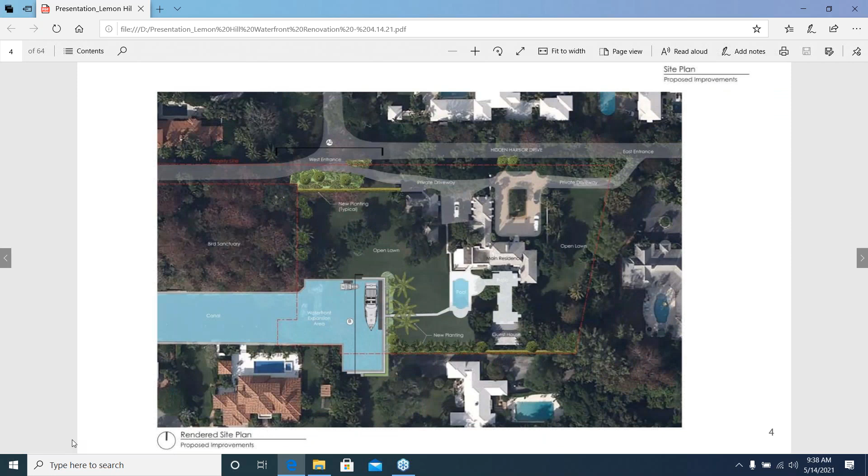Let me give you a quick overview of the project. This is the present condition—the canal comes up to our property, and on top is Lemon Hill, as you can see on a number of acres. We're expanding the waterfront, adding a few docks on our property as well as on the Smith's property, and enhancing the seawalls on Mr. Barton's property, our property, and their property.

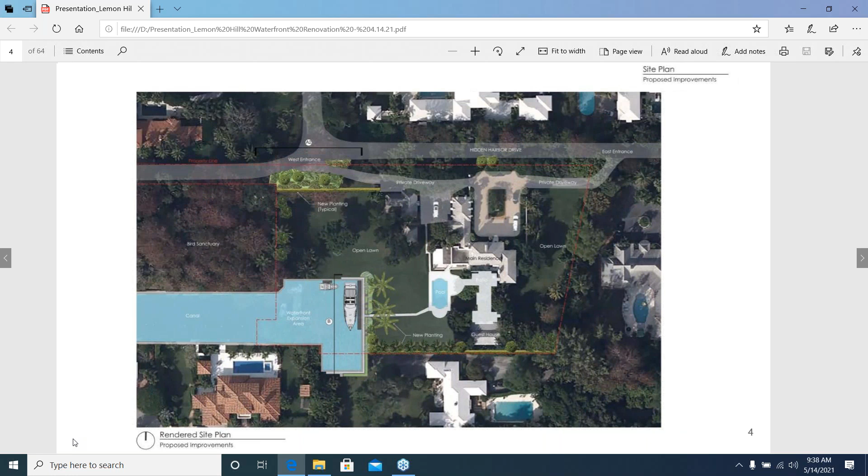This is an enlargement of the waterfront expansion area. We're also going to enhance the west entrance to our site around the service area. At the end of the day, there'll be expansive landscaping so nobody can look into our site, as requested by our neighbors, and we're happy to do that.

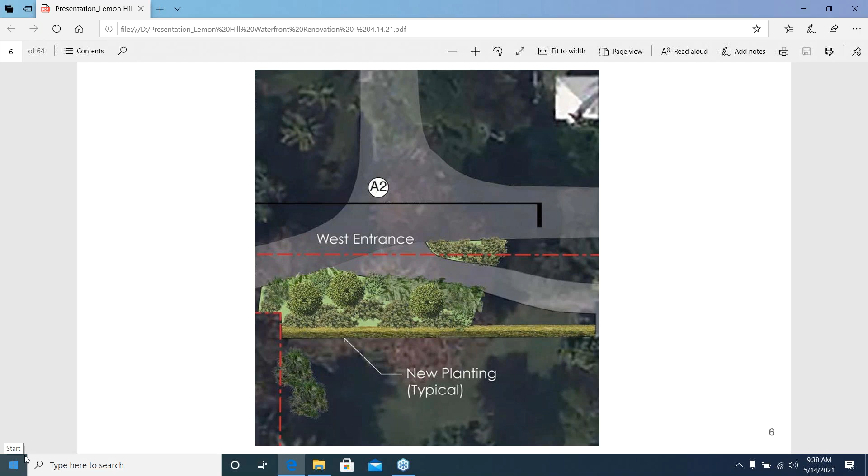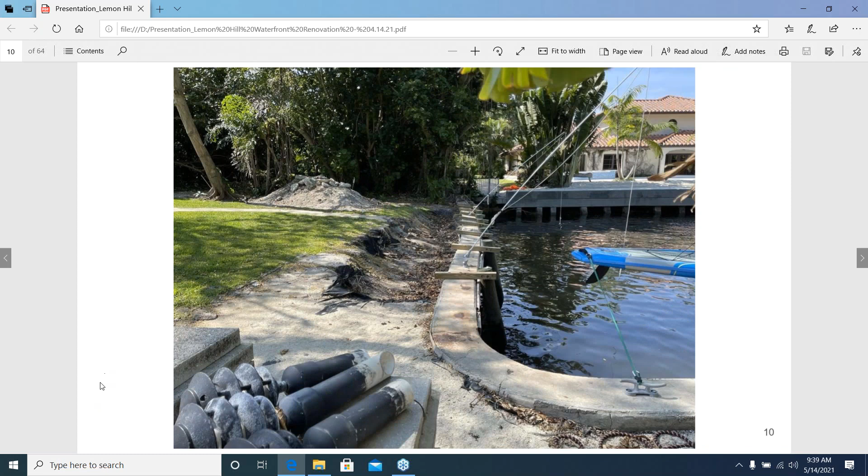So that's an overview—let's talk about existing conditions. When we purchased the property, we knew there were problems with the seawall. They only got worse. We've reinforced them to keep them in place so there'll be no injury to the water or to adjoining property owners. As part of this process, we looked into it and realized we could enhance our seawall system.

We looked into the TRULINE hybrid system, which will be explained later if you have questions about it. Essentially it's an aluminum prefab system that's put into the ground, and then rebar and concrete are poured in. There are substantial engineering drawings with the details, but we don't need to go through that right now.

Let's talk about the existing conditions of the site. As you can see, there's an expansive yard down to the water—you walk down to the water to the seawall.

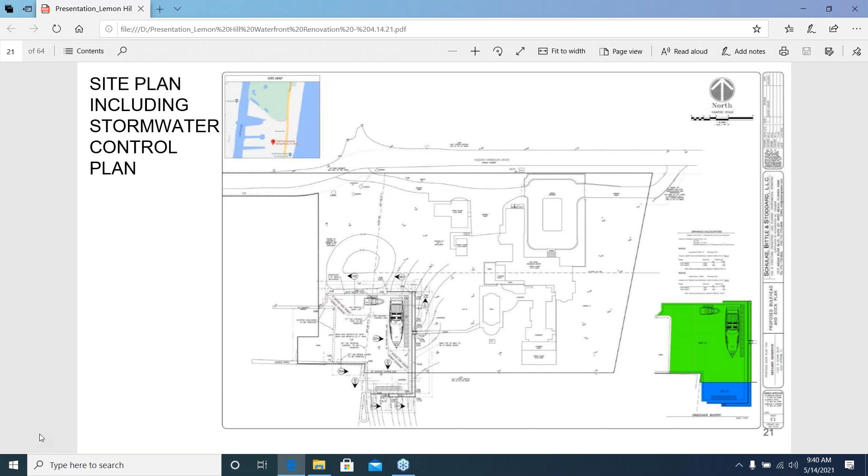That is the area in which the site plan will be implemented. When we remove the land, that would be an area that would absorb water. We are going to keep all water runoff on the site, even though that's not required—stormwater control isn't required for residential properties. We felt the best practice would be to keep the water on the site by appropriately contouring the land.

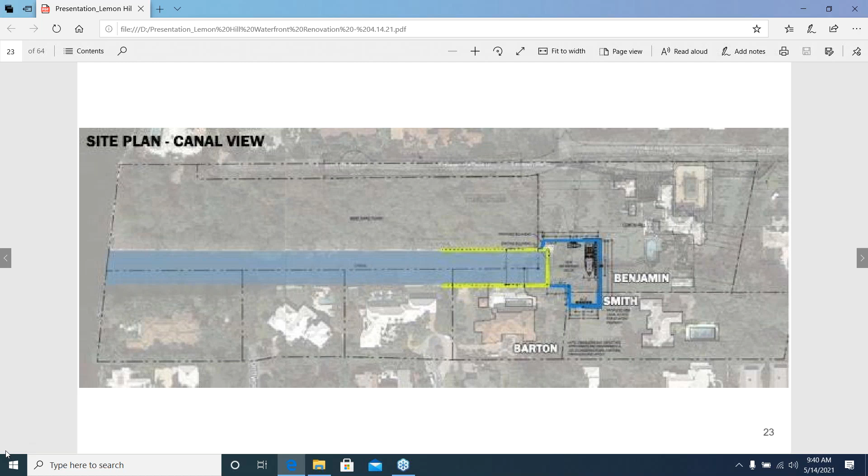This is a more architectural presentation of the waterfront expansion, and it's a place in the neighborhood. We have the Bartons, the Smiths, and the Benjamins, all of whom have entered into an agreement to protect everybody's rights and responsibilities, and everybody's happy.

We have the west elevations—this is a rendering of the west elevation. As you can see, there are two retaining walls because of the contour of the hill. You see the TRULINE seawall on the bottom, the dock, the steps, the retaining wall, shrubbery, extra shrubbery, and then we're planting multiple trees on the site. We'll go into that in a bit more detail.

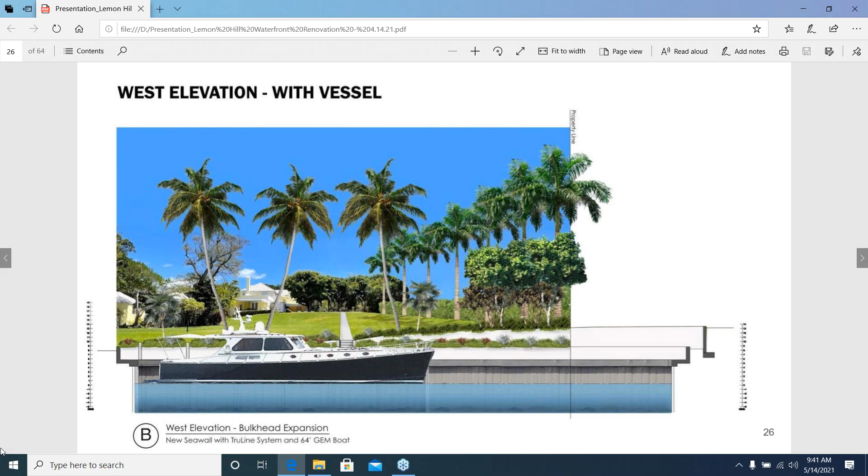This is the classic, streamlined, beautiful 1982 classic yacht that's going to be parked on the site by Mr. Benjamin. I think everybody knows about Mr. Benjamin—he was an Olympian sailor. He's not here today; he has responsibilities. He coaches national teams in sailing and is up in Providence, Rhode Island right now, sailing and teaching and coaching. He wanted to be here, but he has a race today.

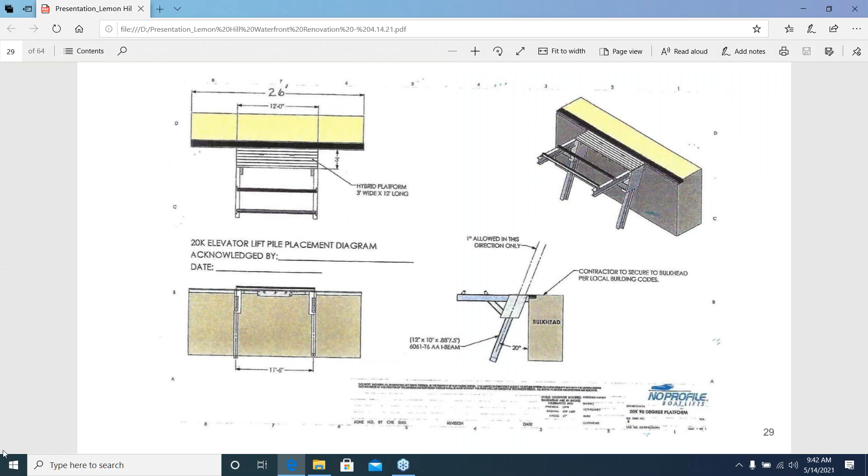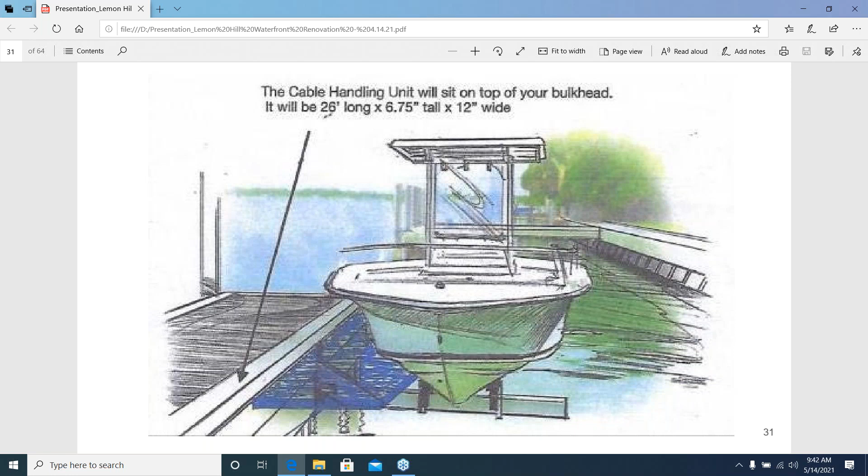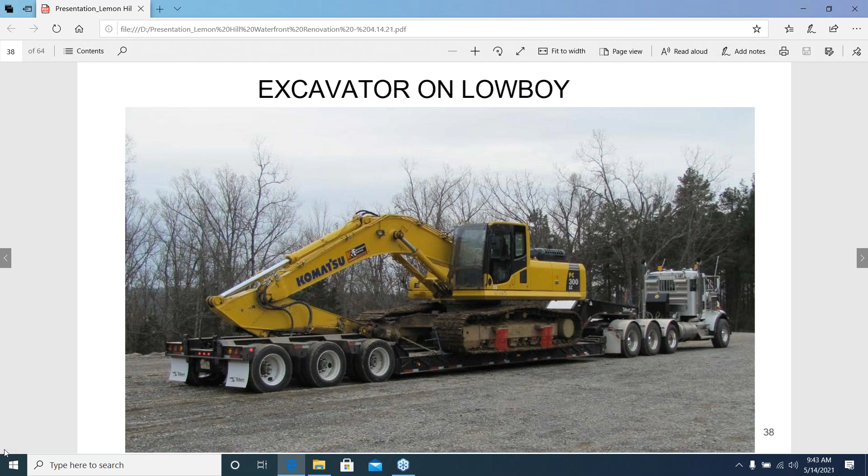So a lot of issues are, how does this project impact the neighborhood? We investigated where the trucks could come in to minimize impact along Hidden Harbour Drive. We looked at the dump truck, which will be running 6 to 8 times a day, and also the lowboy excavator, which is the only truly large piece of equipment that's going to come on the site to start the excavation, and when it's done, it'll be pulled away. So that's the only large piece of equipment. Our goal is to keep it on the site and to enter through the front entryway.

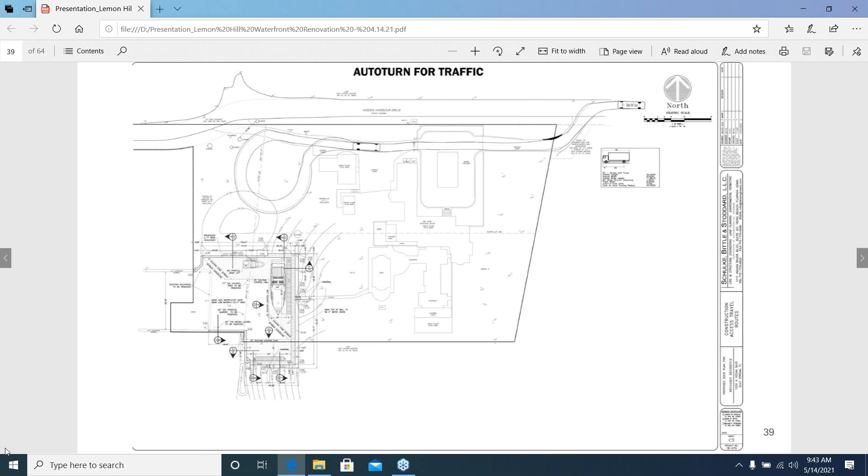It's going to tear up our yard, it's going to tear up our formal plaza in the front of our house. But in order to keep the trucks off the road, we're going to put it through our front entrance and move it through our property, circle it in, and come out. So we did the auto turn analysis. The dump trucks can come in that way, and we'll be able to keep it on site.

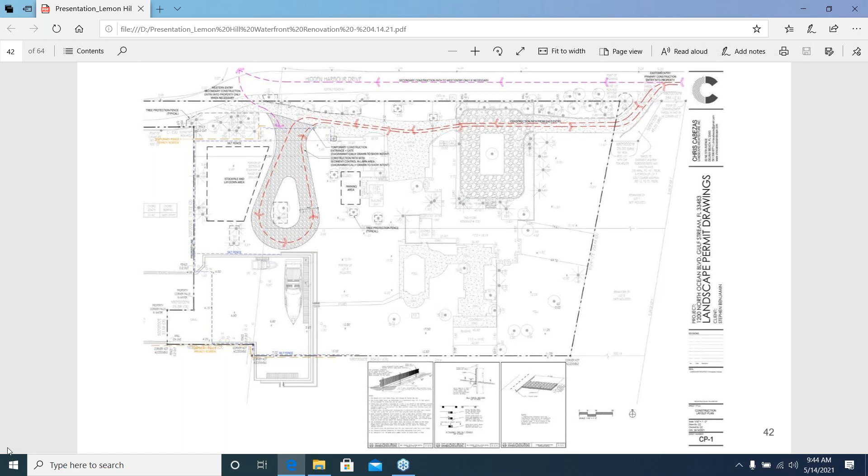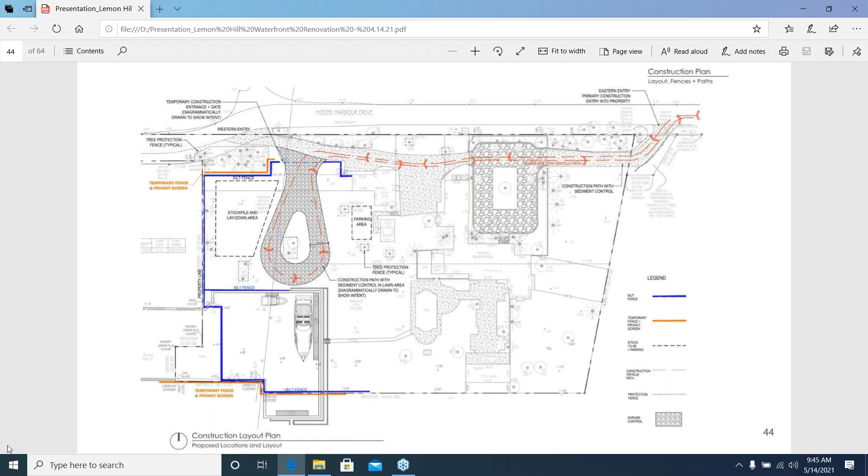So we have construction pollution control, which includes the privacy fence and the silt fences. We're going to be performing dust management, which probably will not be a significant problem because it's like limestone. It comes out wet, and when it's pulled up... I think I lost our signal.

If you can't get it, that's fine. We have the hard copies here. I know, I was thinking—you can't blame it on them. We're taking that at the end of the meeting. Okay, we can run through it. We're on, give me a moment and I'll tell you what page we're on—it's 48, I think it was. 48, I believe, is under dust management. Looks like you studied these plans.

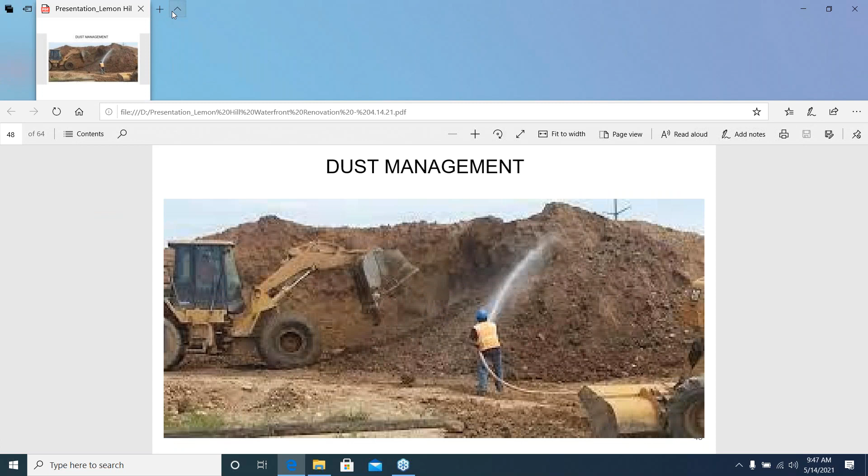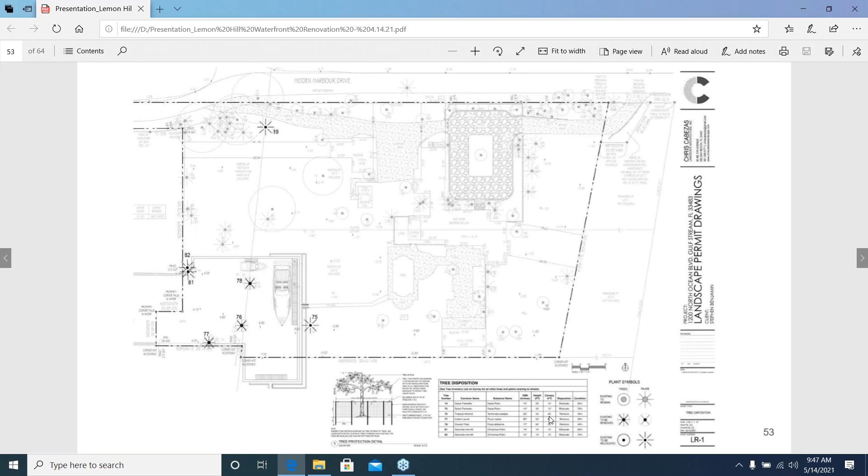So we have landscaping—this is the old landscaping, this is the new landscaping with all the additional trees and shrubbery. If you have any questions, Chris Cabezas is here to answer them. We had a tree assessment from an arborist to evaluate the 3 large specimen trees. They're all in very poor condition. Here's some pictures of some of the trees.

Where are those trees located? They were in the area where it's going to be excavated.

So we had the tree survey, and we went through that in fine detail with your department and with the arborist, to make certain we had a complete accounting. We have already applied to the Florida Department of Environmental Protection to get a permit. We've gotten preliminary review, and it's going through final review right now. At first, we were hoping we'd be able to avoid the Army Corps of Engineers, but apparently we're going to have to do some review with them. It looks like it'll be minimal, at least that's what our civil engineers are hoping.

We are making certain also that the trucks will get through - the garbage trucks, the fire trucks, our trucks, this UPS truck - will all be able to get through. We had John actually walk through the neighborhood with a 14-foot pole to measure the height, just to make certain. There is only one place where it dropped below 13 feet - 12.5 feet is the clearance under the bridges. So we know we're safe and we'll be able to get everything through.

That's the completion of our presentation. Mr. Tiedemann is here to answer questions.

Why don't you give a quick rundown about the TRULINE seawall system so everybody can understand what we're doing there.

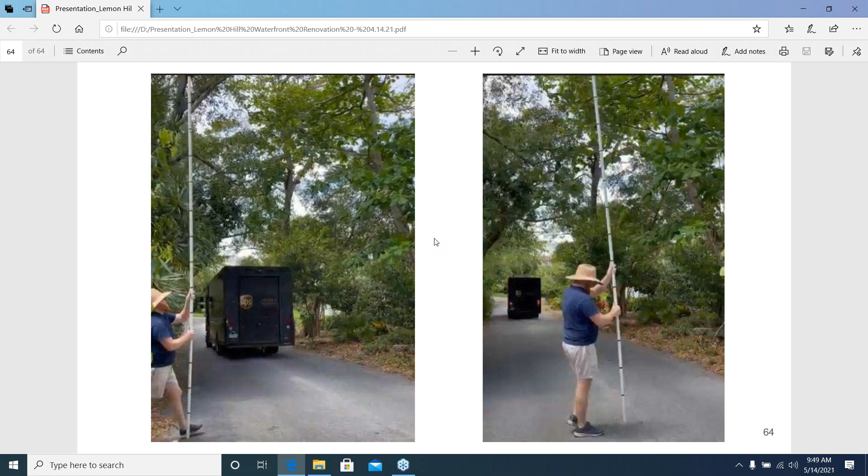So we're moving away, just in general, from your traditional concrete style seawall, where there's king piles and precast concrete slabs, and moving towards the TRULINE. Can you go back to the slide, there was like 10 or 12? Sure. I'm going to roll. Yes. I didn't realize how long a presentation that was.

So this section is your TRULINE panel. Each panel subsequently goes into the next panel and creates a cell, which we then evacuate the solids out of, put in structural steel, and then fill it with cement. This allows us to get at least 50% penetration into the earth, which is different from your traditional style seawalls, whereas you would get good penetration with your king piles and batter piles, but the precast panels usually are only dug in a couple feet into the earth.

Whereas if you had from the mud line to the top of the cap 8 feet, we would use a 16-foot panel and get 50% penetration. That would allow the earth to not be able to come up underneath, and then each panel connected to one another and cast in place creates an impenetrable wall, whereas your traditional concrete wall has gaps and seams that rely on filter fabric, which goes to the wayside over time and generally fails within 20 to 30 years. This is a 75-year rated system.

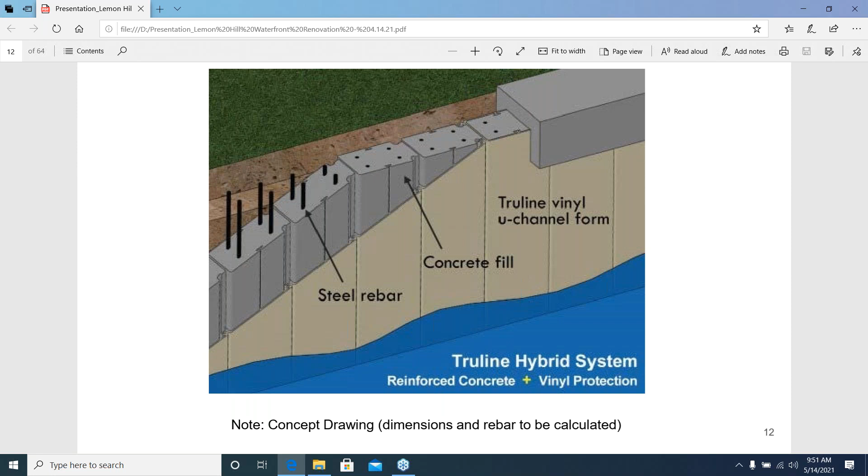Another thing we're doing special in this project, and looking to implement, is for the concrete cap we're going to use basalt rebar, which is a non-ferrous rebar - it's actually made from basalt, so it's a rock, and we don't have any rusting issues. That is the last weak point on the wall. So this is the top of the line seawall.

We're going to use a galvanized helical anchor that will keep the wall from falling forward. And then we use little 2.5-inch ABS jet filter weep holes to reduce the hydrostatic pressure behind the wall, so you get good penetration into the earth. Up here you have your helical keeping it from rolling forward instead of having more concrete in the water like your traditional batter pile. It's a very clean, well-designed, well-thought-out system that is becoming the future of seawalls.

So how far below the mudline will that go? In this particular project, it's very rocky. So the current existing grade is here, and we're digging down approximately 7-8 feet in the basin. Because it's rock, another great attribute of this product is we can come in with structural steel - so here we have rock.

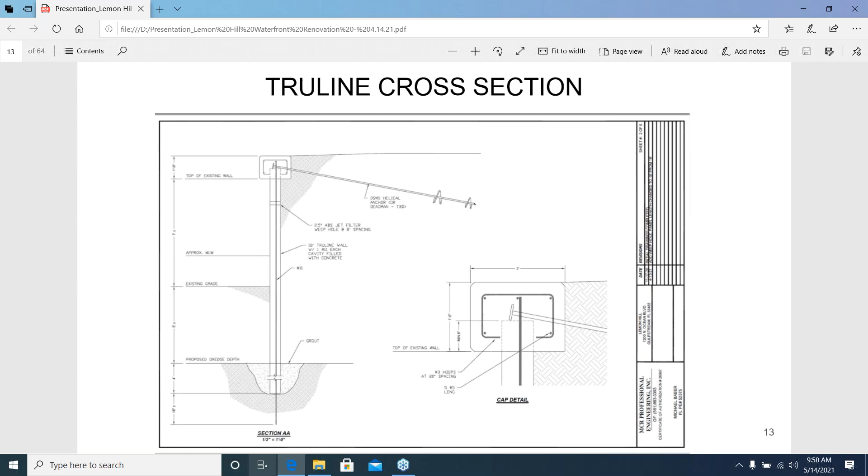Can you all just hit that again, so you've got the boat sitting at the end of the newly carved out basin, and you're adding the additional screen. Obviously different boats have different heights. Can you just, for the record, go over that again, maybe bring the landscape architect up quickly?

Okay, I'm once again having a little trouble with this.

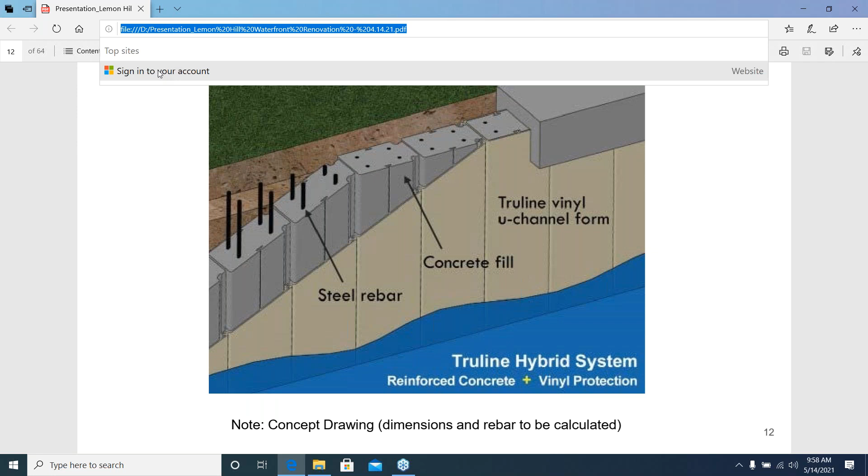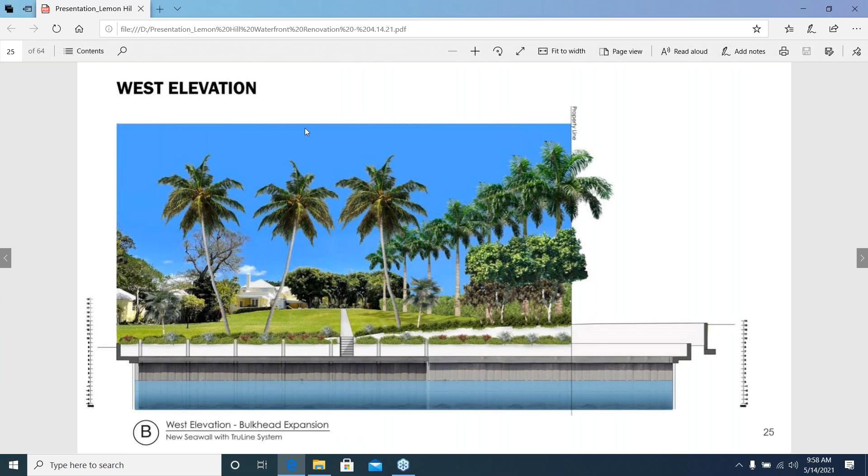Okay, I got it. So you'd like to see the street coming in from the north, and you've got the adjacent neighbors who have agreed to the project. We get the idea that the lowboys can't knock the trees down, you've measured that, but this is just as far as the aesthetics of the screening and the additional trees. I know you covered it quickly on the first one.

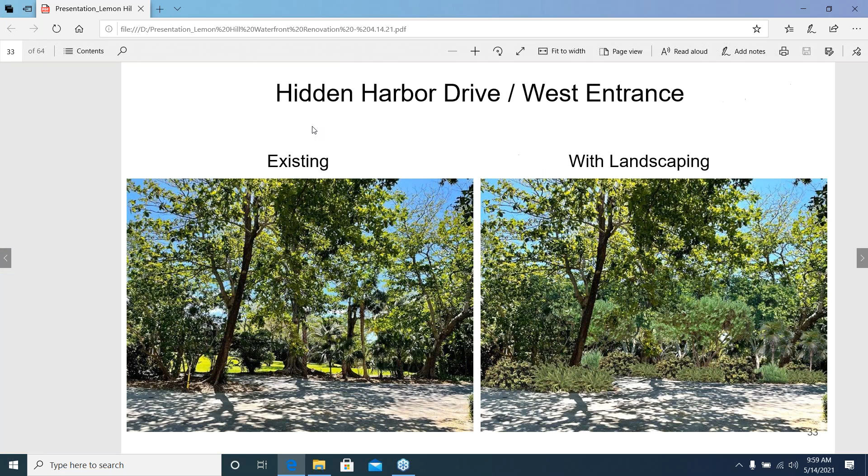Okay, the trees, we'll of course go over the trees, and then we'll go back to the actual design. Let's go down to the trees, the landscape plans, and Mr. Cabezas is here if you have a question. Would you like to, Mr. Cabezas? Why don't you come up here and explain the additional trees and shrubbery that we're installing?

Hello all. What was the question about the height of the buffer?

So you've got basically two different things going on here in the landscape plan. You've got some additional trees and shrubs on the west boundary line there, which is their house. And then you've got the on-site landscaping, which is providing some screening for the Smith property, where you've got some trees going in, and then the access road, which I think has caused some concern when everyone's driving to their houses - you're adding 30 trees.

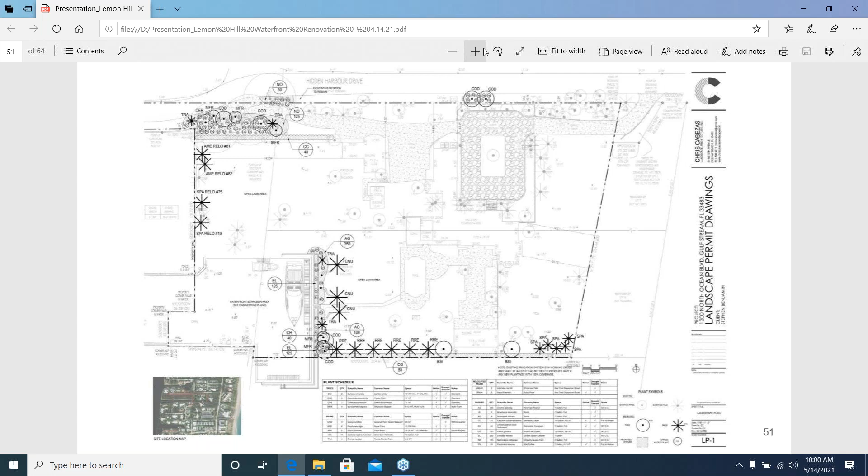Sure, and the renderings and elevations are actually the best way to see the heights, but I'll go over it with the plan. The northwest side is a very dense buffer that's matching the existing condition of the vegetation going down Hidden Harbor. We're planting pigeon plum trees, Florida thatch palms, buttonwood trees - all natives. That will be a tall tree between 10 and 15 feet of height. Then we have large shrubs filling in the gaps between 3 feet and 6 feet, which will be wild coffee and other shrubs that are existing to match the aesthetic. And then a ground cover, full density, full screening.

As we get to the expansion area, there are 2 retaining walls. We are planting those with some native ground covers, some flowering accents, a few palms just to frame views, nothing to obstruct too much of the waterfront views from the house. And then on the southern border with the Smith residence, we're adding a clusia hedge with some gumbo limbos and sable palms and royals. That is the extent of the landscape plan.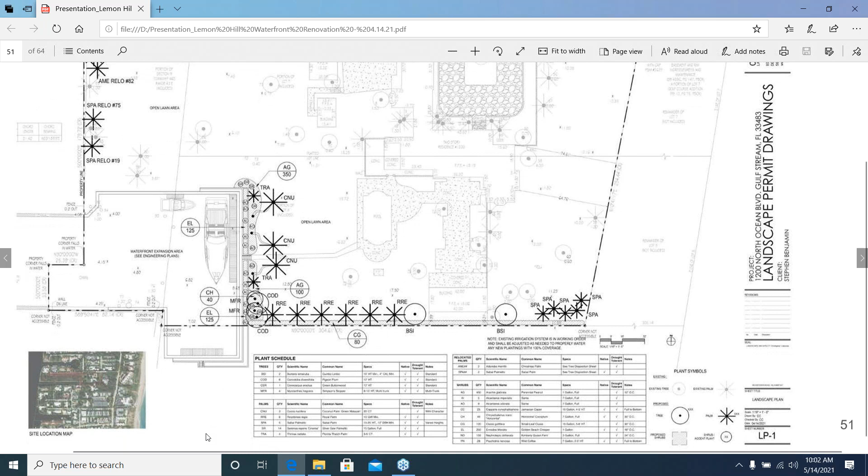And then the boat heights - I know the bigger boat is 64 foot long, and it's a low boat, it does not go very high. I'm not sure of the actual height. And the secondary boat, I believe, is a very small boat, maybe 24 feet or 29 feet. You should not be able to see that from the street at all with all the vegetation going in.

Okay, thank you. Thank you. Any other questions from the commission?

Mayor, I just want to make a comment. I took the opportunity to review the prior ARPB meetings, and it was a good dialogue between the applicant and the various homeowners. I really do think the applicant has worked hard to be responsive. I think the town coordinated those discussions well. As I understand, the town is also undertaking a survey in response to a request by a neighbor on the preserved property - that survey has been completed and verifies the correlation of the property lines. So I think at this point it's been well vetted, and solutions have been provided to address concerns, and from my perspective, I think it's a nice change.

Okay, very good. Mr. Dunn? Just 2 quick comments. I just wanted to say, now that we're getting to the motions.

The landscape plan was approved, that's a level 2, so that one was approved at the ARPB meeting. And then you'll notice in this motion down here, you actually have two approvals in the same motion. That would be the demolition permit and the level 3 architectural site plan. So that's all in one motion.